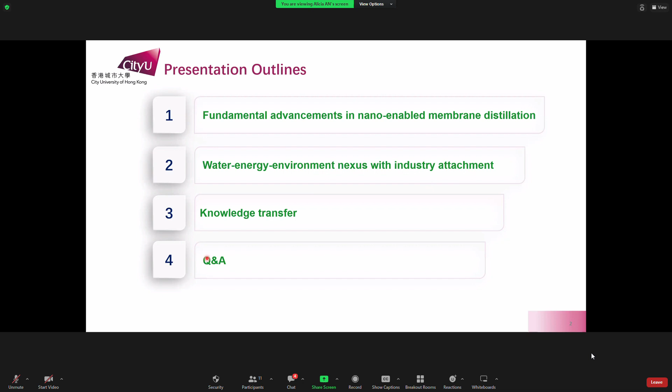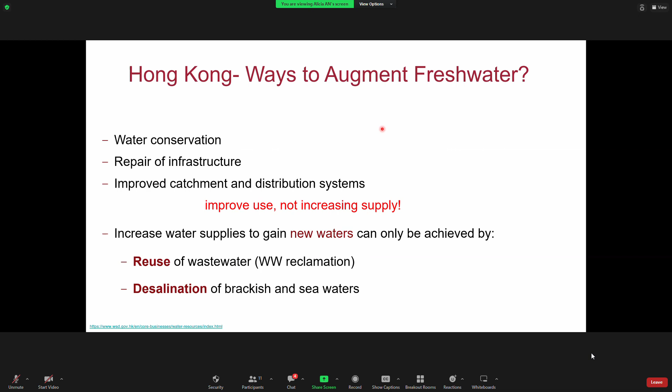So I would like to start with an introduction of our water cycle in Hong Kong. Hong Kong has a very unique water cycle. Our water is like Singapore's: most of our water is imported from outside of Hong Kong. So we've been working on how to improve water security, and just promoting passive measures, like improving usage and not increasing supply, was not practical enough. So recently we want to increase the reuse of wastewater, which means wastewater reclamation, and we will start desalination. Our first desalination plant will start to operate next year.

So this is our water cycle, and we have a very diverse water resource. Starting from the local yield, which is only 20%, we pretty much depend on the water from China, from the Dongjiang River. And this is very interesting: we used to use, and are still using, seawater for toilet flushing. By having a seawater direct pump and simple physical pre-treatment, it can save about 20 to 30% of the fresh water which would be used for toilet flushing.

So this was the current water pie chart. And now we are going to have a desalination plant and recycled water. I also learned a lot from Professor Song's talk that when we have desalination, the brine will also be an issue. We also need to think about how we can either capture the resource from the brine or increase the water production, etc.

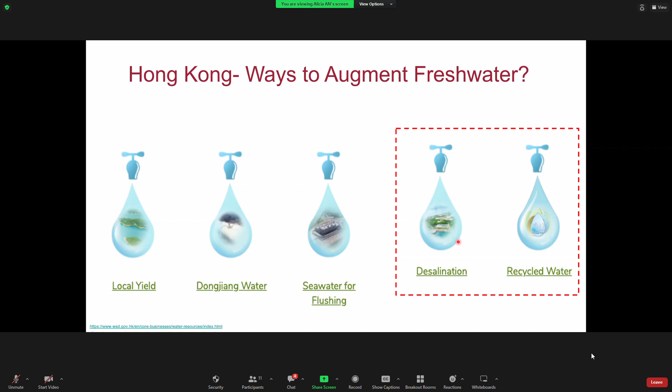All right, so let's look at our water cycle. I think we all learned this water cycle in primary or middle school, which illustrates that water is evaporated by sunlight, and then these evaporations lead to precipitation through clouds and rainfall. The water from this precipitation is actually 10% of our freshwater resource. It's coming from the water captured in the atmosphere, and the phase captured in the atmosphere is vapor. So in this process, the water is always changing phase: liquid, vapor, and liquid again.

So learning from this natural water cycle, our group started to think: can we actually engineer this water cycle system? In order to do that, we need to understand the energy balance. When you look at water vapor, water vapor is a very important energy carrier.

So it can be used for power generation and sterilization or water purification. However, this water vaporization, which thermally changes the water phase from liquid to vapor, requires very intensive energy. Why? Because we need to break the hydrogen bonding. At 30 degrees Celsius, in order to evaporate 1 kilogram of water, we need 2,500 kilojoules.

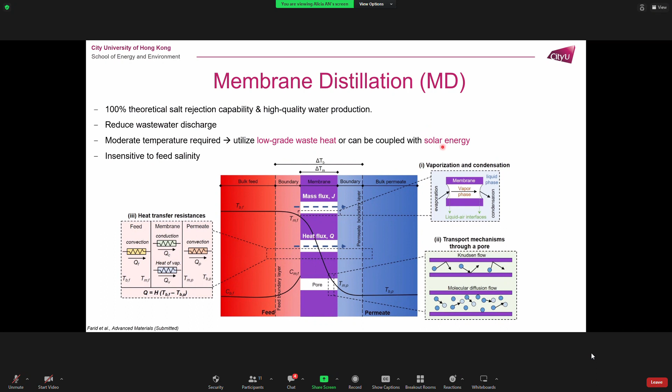So it can be used for wastewater reclamation, and it can also be combined with RO for brine treatment, etc. And not to mention the opportunity of low-grade waste heat coupled with solar energy, and I will spend half of my talk on this integration of solar energy.

Okay, so recently we were very lucky to publish a paper in Advanced Materials reviewing membrane distillation with a focus on nanomaterials. If you have a chance to read our recent publication, you will understand how membrane distillation has actually developed over the timeline. And if you look at this, the number of papers actually grows exponentially from 2000.

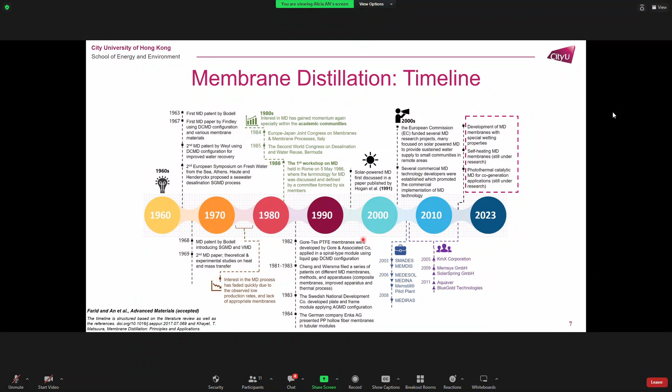That is actually the starting point, after we started to have a membrane, the Gore-Tex PTFE membrane. Before, even though we understood this concept, we didn't have a proper material or a proper module system, so it only remained an idea and there was not much publication. But after we identified that we can produce the membrane materials and modify the system, from 2000 publications increased exponentially. And recently a number of industries have also joined the membrane distillation community to move from lab scale closer to commercialization.

Okay, so when we studied the membrane distillation process, we found three domains of inherent limitation. The first is membrane degradation. That is the same as any other membrane process; most pressure-driven processes suffer from fouling and scaling. But in particular, in membrane distillation the membrane has to be hydrophobic, and we have to retain this hydrophobicity to block liquid water passing through. So wetting is another inherent limitation.

Okay, so temperature polarization. This is very important to understand the fundamental behavior of membrane distillation. Even though we can utilize the pressure gradient to evaporate water at a lower temperature, the water temperature on the feed side still has to be increased. The problem is when we increase the feed temperature, the driving force is actually the temperature across the membrane. So there is always a gap between the temperature on the feed side and at the membrane because of energy loss, and that creates temperature polarization.

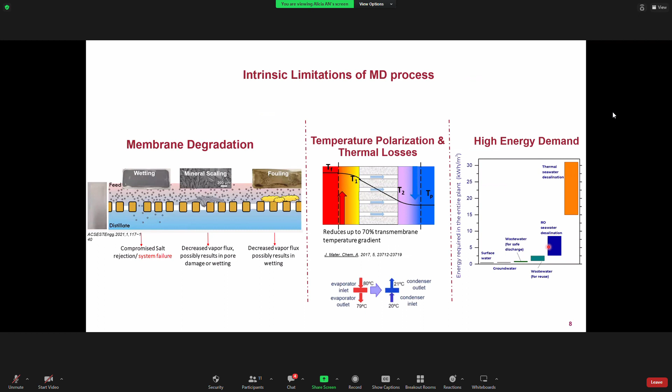Okay, so in terms of the enhancement of a membrane distillation process, Decca and also Dr. Guo, who will give a talk after my talk, have been working very hard. And also we have published quite a number of papers on enhancement of the membrane performance. We changed the membrane structure and also surface chemistry.

And in terms of the energy part, we are still working on whether we can directly use the solar energy instead of the energy to increase the feed water, which will increase the bulk water temperature. So our study first focused on this membrane performance, and then we recently tried to integrate with the direct solar driven process.

And then, based on our knowledge, we learned this sunlight, this photothermal energy, can give us more opportunity not only for the water production. By manipulating or smartly utilizing this nanomaterial, you can generate the cooling water at the same time, generate energy such as hydrogen, or you can reduce the carbon dioxide. So this is our ongoing work.

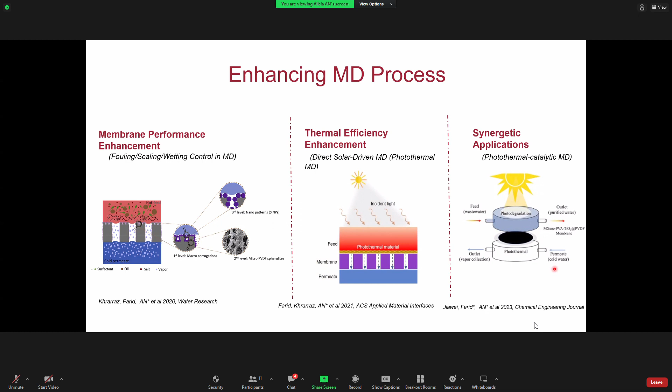And we have quite a number of publications in the membrane performance. And also recently, we published in Nature Communications for solar driven membrane distillation. And this synergetic application is in the pipeline, starting from Chemical Engineering Journal. We are expecting to have a very high quality publication in the coming years.

So this is our role in advancing the membrane distillation membrane and the process, starting from 2015 to our recent time. And also you can see the name of Dr. Guo and also Dr. Decker here. And it generated not only the papers, it brings a lot of fundamental research and also integration with industry, as well as other internal funding.

Okay? So here some figures show the main feature of how we improve membrane surface chemistry to be very superhydrophobic, which can repel the water and also keep very low surface energy to let the water bounce on the surface. And you can see here that our membrane is even omniphobic, which can also repel the oil as well. And this is the illustration of how we can concurrently produce water, at the same time hydrogen, and also reduce the CO2.

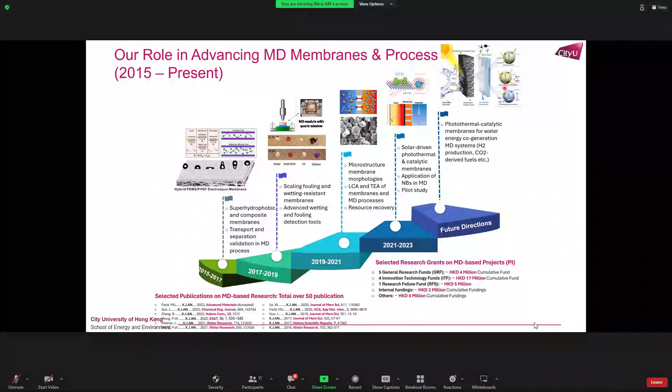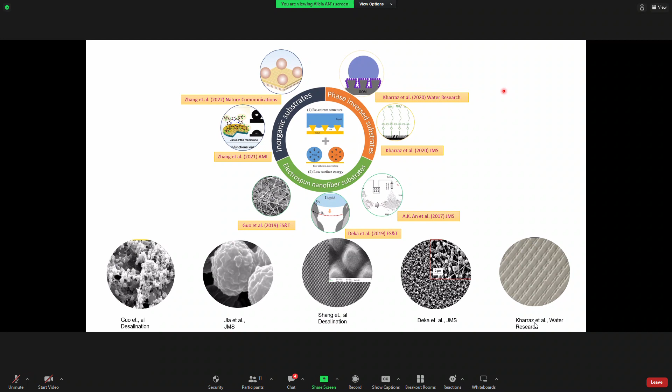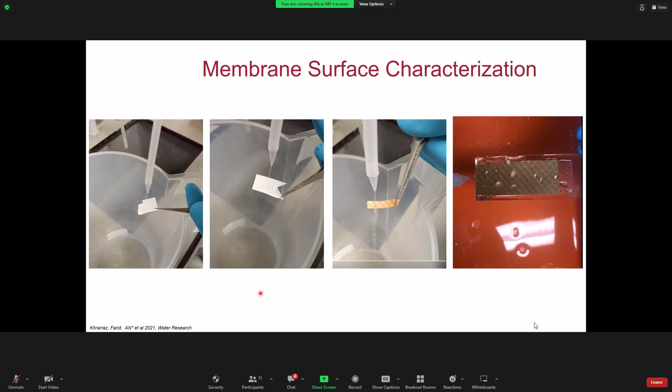So let's start one by one. I don't want to spend a lot of time on the membrane because we actually have quite a number of attempts to improve the membrane chemistry and the structures. So this is kind of image. And I just want to show this video showing that with our membrane, we have made it very highly repellent to water. And you can see that once water contacts the membrane, it just easily rolls off. So this is a very superhydrophobic and also omniphobic membrane.

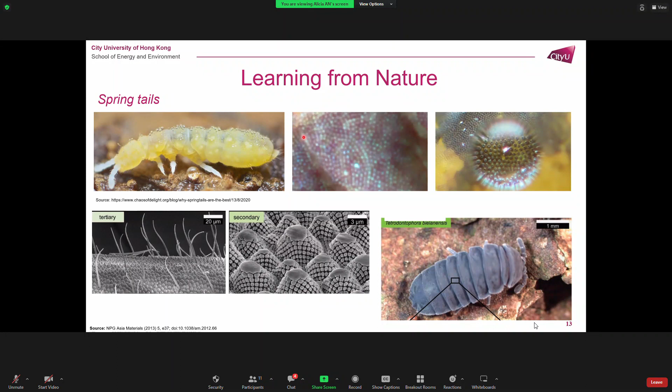Something I want to share, a very interesting story that we plan to submit in a very high impact journal: we also learn from nature. We understand the springtail surface chemistry, and we discussed with our former PhD student, who now became a faculty at Xi'an University, Dr. Guo, whether we can actually pattern this springtail into the membrane chemistry. So we've been working on this quite a number of years, and recently we made a very good result: based on this PS, the polymer structures, we actually mimic these springtail structures.

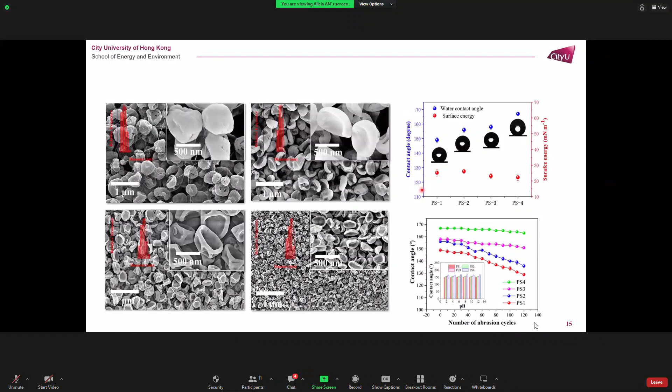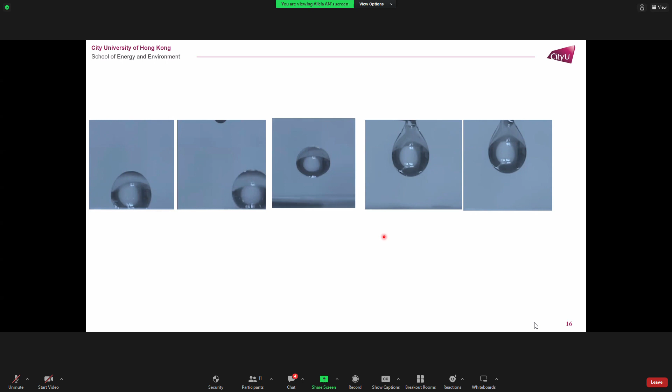And you can see from the video that this is very, very highly superhydrophobic, and when water contacts the membrane surface, it just has a jumping effect, which demonstrates the membrane has a very, very low surface energy. So why is low surface energy good? Because it has a very low ability to capture the water, so only vapor will cross, and all this foulant and scaling will have a very minimal effect on the membrane surface. Which means the membrane can be very strongly anti-fouling and also anti-scaling, not to mention the wetting part.

So not only do we make a membrane, we also developed a tool to monitor, because it's very difficult to see what is happening on the surface of the membrane. So our team has been working on optical coherence tomography, a kind of 3D image of what is happening on the surface of the membrane in real time. Using these optical tools, you can see the dynamic between the membrane and the foulant, and also any type of material passing through this membrane.

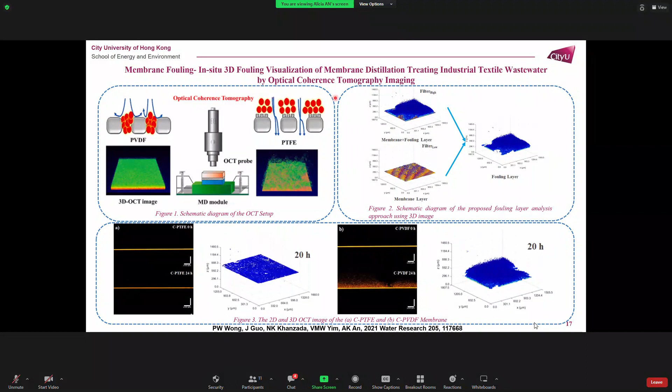So we were one of the very active groups, where we published a number of papers using the OCT to understand the dynamic between the membrane and the foulant.

And in terms of wetting, at the initial stage, we only depended on the flux and the permeate quality. But then we realized that there is always a delay of wetting, that once it happens, it's too late to revert. So I worked with one of my students: can we come up with a good idea?

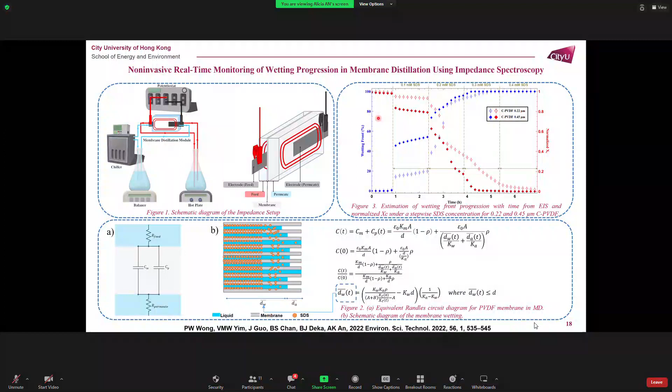So actually Deka has contributed a lot on this non-invasive, real-time monitoring of the wetting progression in membrane distillation using impedance. This is electrochemistry, where you use the current to see the impedance. They give a different pattern when there is wetting and no wetting. So we can have an instant signal of the wetting rather than wait until wetting happens and then you see the effect on the quality of your permeate. So we have also published quite a number of papers.

So this is something very interesting I want to share: recently we found the nanobubble study is very interesting. We have a project on nanobubbles with aquatic chemistry, also working with a fish farm. Along with it, we found that nanobubbles can be a very good cleaning or pre-treatment for the membrane. First, we tried to understand the nanobubble characteristics. We have a review paper just recently accepted on nanobubbles, titled "Small Bubbles Make a Big Difference in Water Chemistry." We review how nanobubbles are used in different fields of water and wastewater treatment.

Okay, and we have done some characterization. As the name nanobubble suggests, the size of the bubble is about 100 to 150 nanometers. So how can we see it? You cannot see it with your bare eyes. So we need a laser pointer: with nanobubbles, the light is reflected, so you will see the laser beam color. But without nanobubbles, you don't see any color, right? And what is the difference between nanobubbles and microbubbles? They are so stable. Microbubbles burst and disappear after a few minutes, but nanobubbles stay 14 days, even a month.

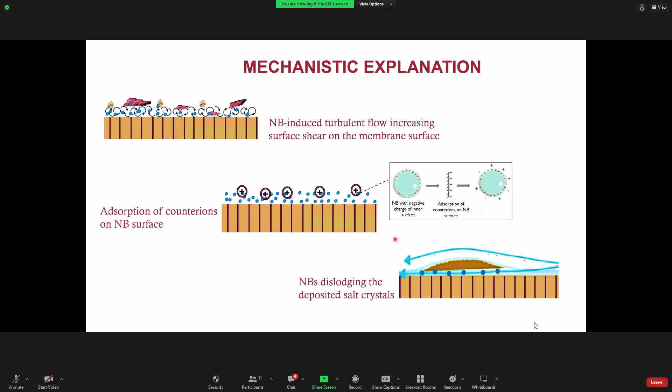So we applied nanobubbles to the membrane to try to delay wetting, fouling and scaling. Nanobubbles in membrane distillation for delaying scaling worked very well. We published a research paper in the Chemical Engineering Journal. Something interesting we found is that with nanobubble assistance, the membrane can keep its hydrophobicity better than without nanobubbles. This is an indirect result that the membrane can keep its hydrophobicity in the long term. We are still investigating, and hopefully we will have more good publications in the coming years.

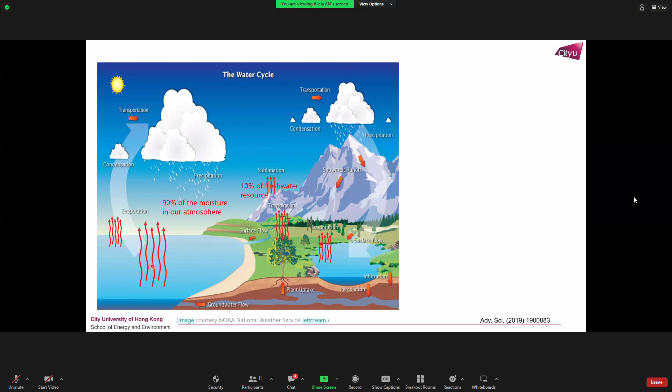Okay, so now I'd like to introduce thermal efficiency enhancement in membrane distillation. As I explained, the water cycle, right? To have this water cycle from the liquid phase to vapor and condensation to create fresh water, we need a lot of energy. In our natural system, we use solar energy. Do you think all this solar energy can be absorbed 100% by water? No. Only 20% of the solar energy can be absorbed by water, and that is used for heating the bulk water, not directly for changing the phase of the water.

So in the early stage of study, we used nano-enabled materials to directly increase the bulk water temperature. But as I mentioned, there is a lot of energy loss. You can see here that in evaporation, after losing a lot of energy, the energy changing the phase from liquid to vapor is only minimal. But of course, depending on the material, you can increase the solar evaporation rate compared to directly heating the bulk water.

So what is a smart way to increase the solar absorption rate? We can make a different layer, which means you can localize heat. You make one layer as a localized heating system so that all the energy will be captured there, and the water phase change happens in this layer instead of the bulk. There have been many studies published on solar evaporation using many different materials.

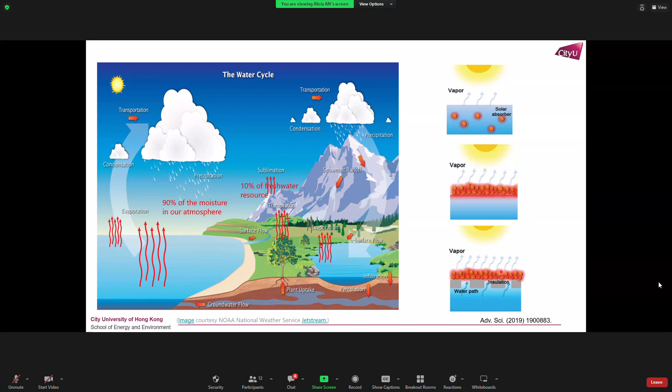Okay, so what we have done is, instead of the standard membrane distillation, which has temperature polarization, we try to localize the heat on the surface of the membrane. So you can see the temperature on the membrane surface is higher than your water bulk. Here, the temperature at the membrane is lower than your bulk, but here it is higher. So you can maximize the delta T, which means you can increase your driving force.

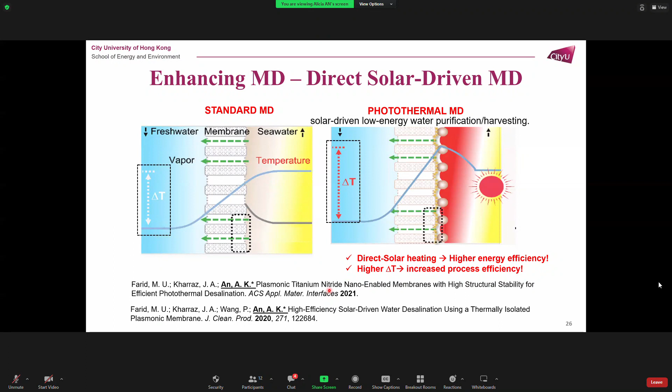So at the beginning, we used a very common material just to test it, because the literature has already shown and summarized what kind of material can have better solar-driven interfacial evaporation efficiency. And this is the equation of specific water production. And its material is metal. And material which has a high solar absorption rate is good for solar-driven interfacial evaporation.

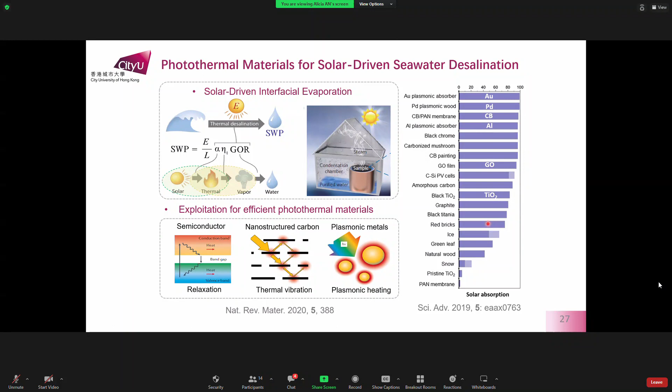Of course, plasmonic materials and platinum are good, but they are expensive, right? So something black which has sufficient and efficient solar absorption will be good. So we have done some study and identified a number of materials. We have tried titanium nitride. We have tried MXene-based materials. And the reason we use MXene-based material is it has a very broad solar spectrum and also a very high solar absorption rate.

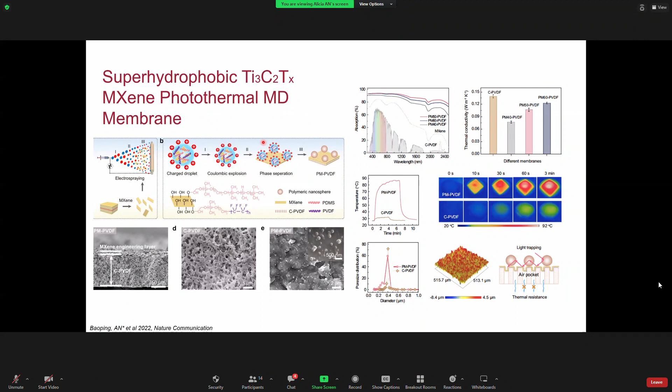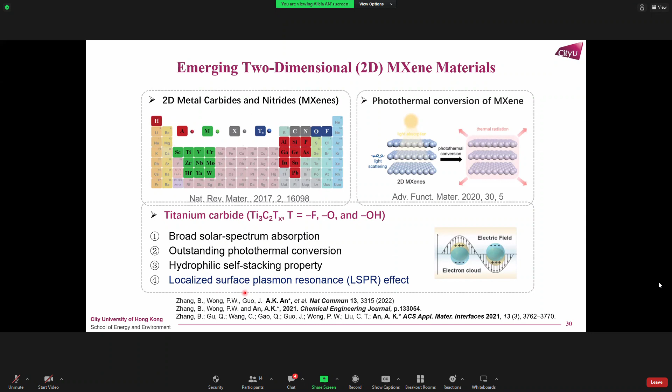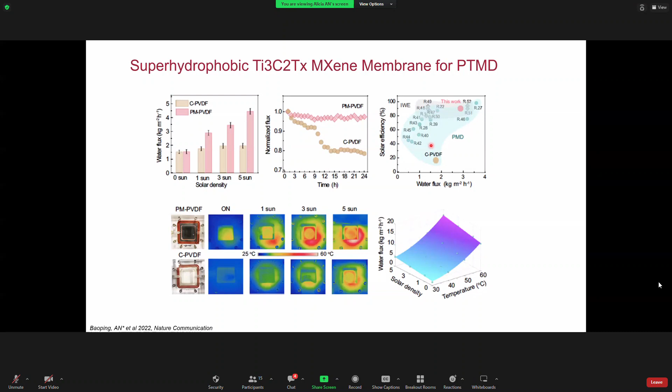So we have a number of papers published based on this two-dimensional MXene material combined with membrane distillation, which demonstrates outstanding photothermal conversion and localized surface plasmon resonance. One of our key points here is, as I mentioned, the water flux and solar efficiency. We have achieved more than 90% with about 3 kg, which is beyond the thermodynamic level, and one of the top performances in the published literature. So we have shared our knowledge in Nature Communications.

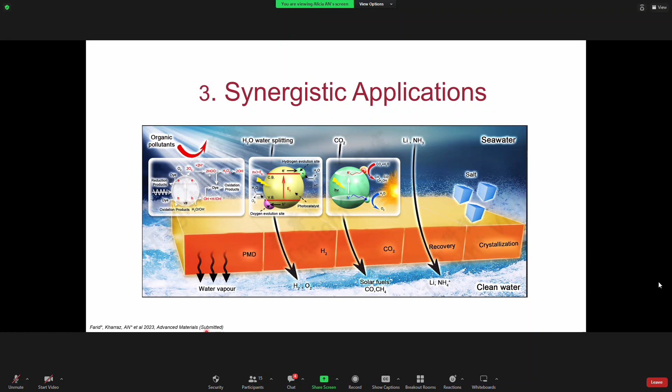Now moving into synergistic application. So this is ongoing work, and in terms of the experiment, we are having some good results. And in terms of material, we have reviewed and submitted to Advanced Materials.

So what we learned is, by manipulating this catalyst, which is photothermal and also a catalyst, and MXene is known as a very good co-catalyst, MXene can work as a photothermal agent. At the same time, it has very good compatibility to work with other catalysts to give us other functionalities. So we have tried MXene and TiO2 as a case study, and recently we're moving on to CdS to concurrently produce hydrogen. Okay, and this is all the characterization.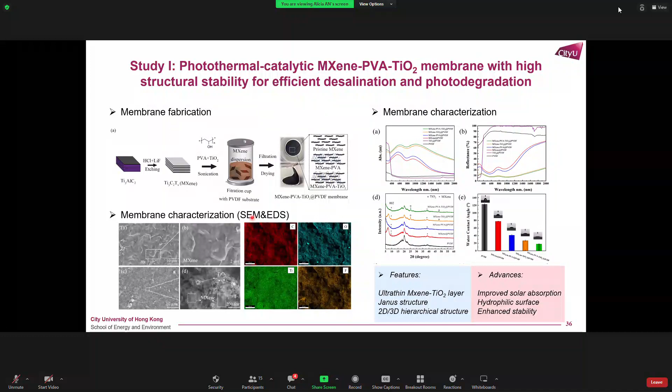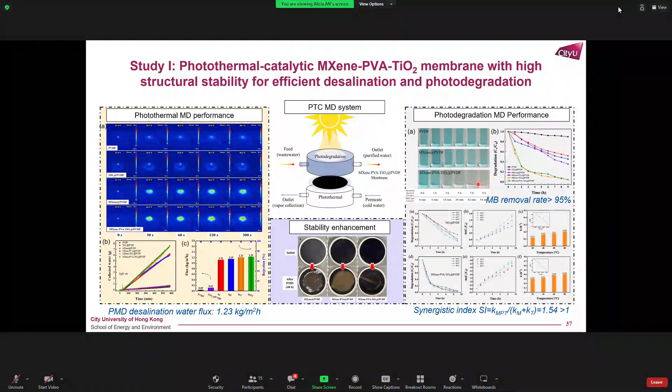And now this is unpublished work for the hydrogen production part. So initially we tried the same material, but it has a limitation. The reason is, as you know, to generate hydrogen is a water splitting process, which means you need a hydrophilic layer because you need to split the water molecule. So strategically we developed the hydrogel layer with the MXene. Which means we have a hydrophilic layer where you can uptake water, all right? And at the same time, the light to heat conversion is taking place, and also the electron carriers convert your energy from light to heat, okay?

And then from there, that is a kind of synergistic effect of water splitting. At the same time, the hydrogen conversion is happening in this system, okay? So we were struggling at the fundamental scale because we need to optimize the best condition not to lose this hydrophilicity, which means the water splitting, and at the same time to keep this capacity of light-to-heat conversion based on this material.

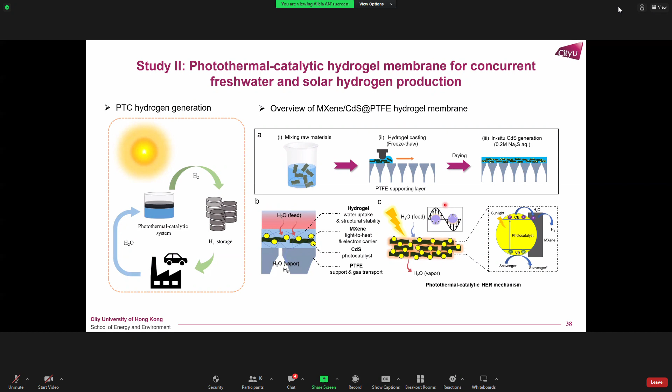So we did a lot of study to understand this photothermal catalytic HER mechanism. All right, and this is the image of the recent membrane. We are still optimizing. You will see this porous hydrogel layer, and you can see a very shiny color. This is hydrogel, and also the color is dark because of the MXene.

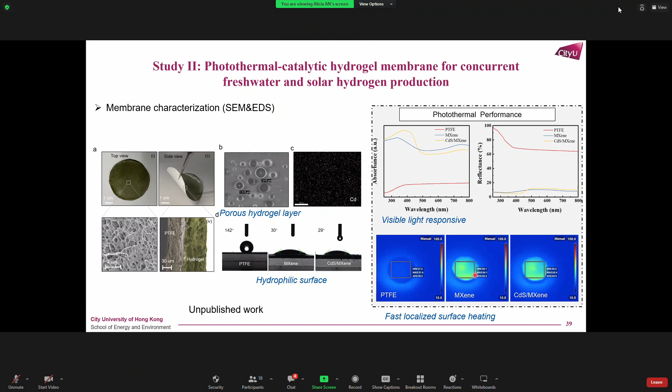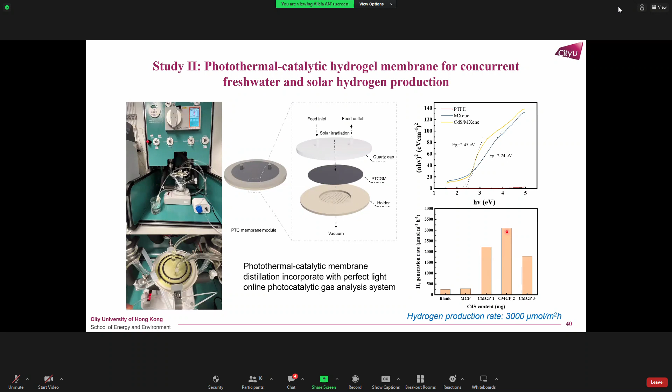And we successfully regulated this hydrogel layer thickness, because many published studies have a very, very thick hydrogel layer. Well, there is always a trade-off between the thickness and your permeability, right? So we successfully controlled these hydrogel layers, so that our recent results show that we keep this localized surface heating. At the same time, we have good hydrogen production, which reached about 3,000 micromole per square meter, which is comparatively high compared to the existing literature.

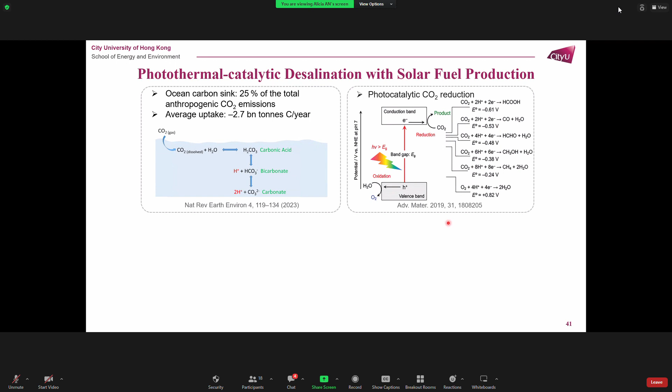So the other study, for the CO2 reduction part, we are making some good progress. One of my students is also working on this, to make this MXene TiO2 material into a membrane. And our recent study shows very good results on the hydrogen and CO2 conversion to CO and then methane.

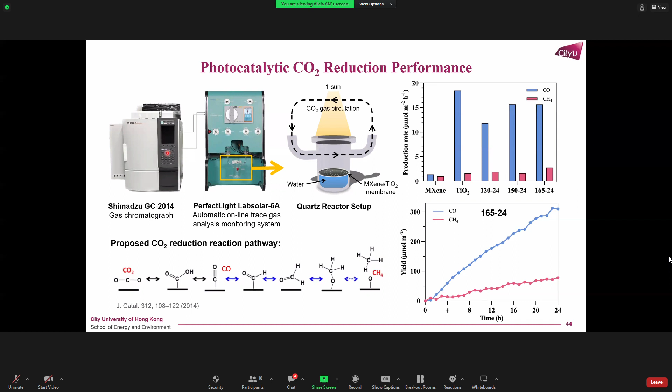And this is our system. Initially we had a very small scale system, and recently we designed this photocatalytic CO2 reduction and hydrogen reactor. Inside, this is the solar simulator, and this is the reactor, directly connected to the GC. Before, we had a difficulty with the accuracy, but now whatever we generate, the hydrogen or the reduction of CO2 and the CO and methane generation, the data will be directly sent to the GC, and we automatically monitor all the reactions happening in the system.